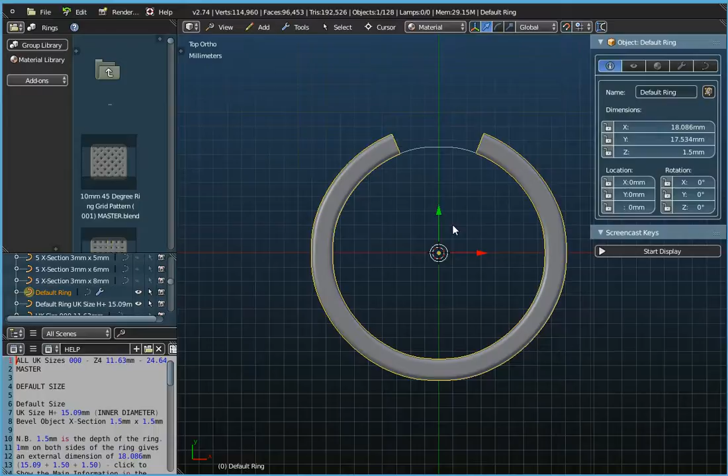At the moment it's UK size H+ set on the inside of that. Well, we're going to change that, and I'm going to change it to UK K+, 16.1mm, which is that object there.

So we need to change the original ring here. If we highlight it, and in the properties panel, if we go to the curve data information, if we go to the modifiers, we're going to change the curve here from the default ring to our new size UK K+.

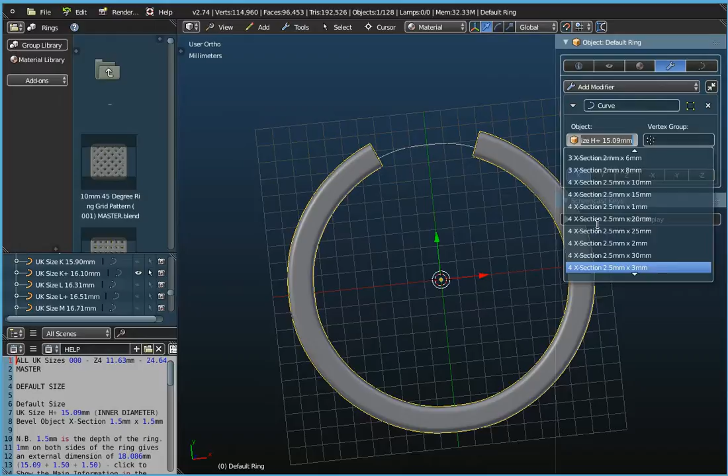So we just need to scroll down through those. So we want UK K+, 16.1mm, and then we just need to double check that it's actually lined up with the inside of there.

If we just view it from the top, not looking too bad, but perhaps if we just press the tab key and go into edit mode, we'll be able to see better whether it is in line with the x-axis there. Yeah, that looks okay. It is just touching the x-axis, so that's fine.

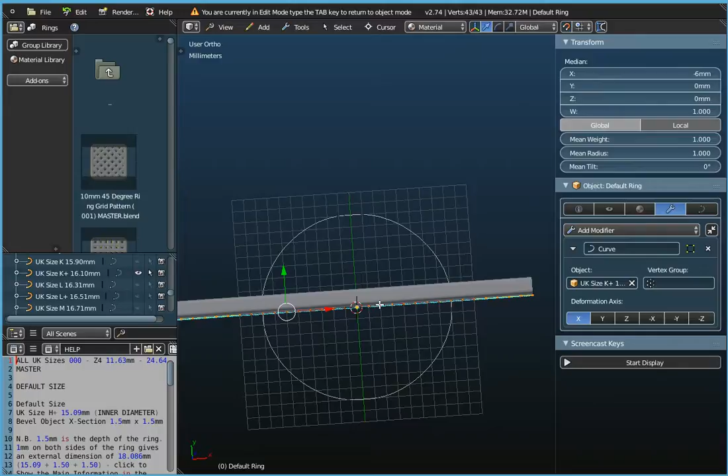So we can press the tab key to come out of edit mode. So if we just view it from the top there.

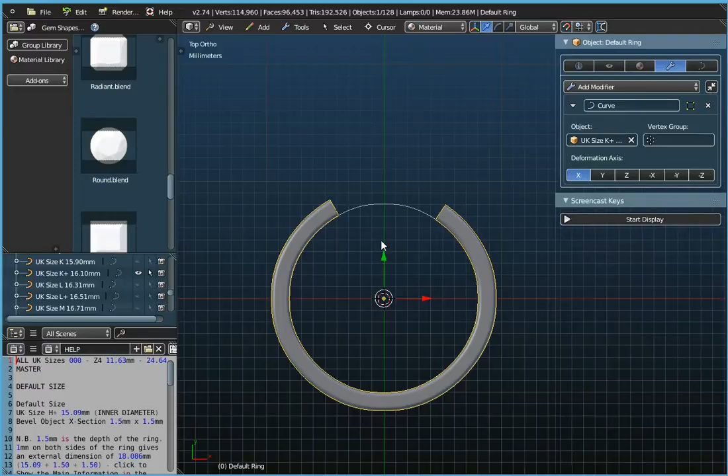Now we're going to use a round gem here, so if we just have a look in our menu system, we've got gem shapes. We're going to use the round gem, and as usual we don't drag and drop this object onto the workspace because our ring will disappear.

What we've got to do is append it from the folder gem shapes. So if we go to File and Append, and if we just go up the menu system to the groups folder there, we're looking for gem shapes, and it's the round gem that we're going to use, and as is usual we need the object. So it's the round gem object that we append from the library.

Now if we just make sure we click on it, and we've got the yellow outline. If we look at the size of this, the default size for all of these gems is 10mm diameter.

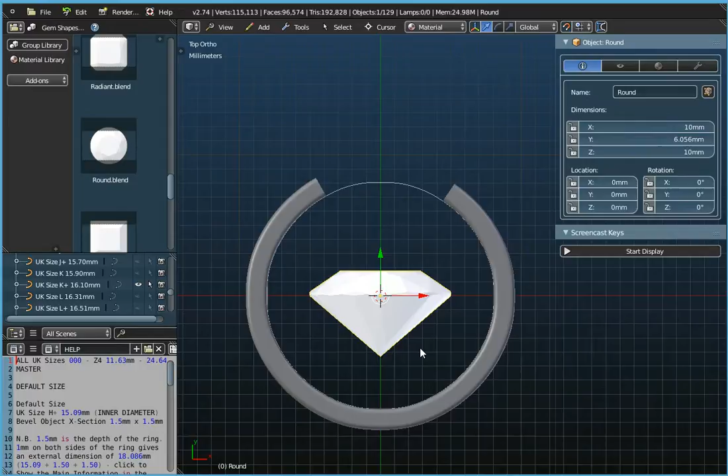So we're going to assume that the gem that you're going to use for this ring is half that size, in other words 5mm. So what we can do is, I'll just switch on the screencast keys. If we press S on the keyboard, and if we enter 0.5, we can scale that down.

So we're just using this gem so that we can size the gap for our ring here. Okay, so I'm going to not worry about the Y dimension here, but if you actually have your own ring, you can set that value as well.

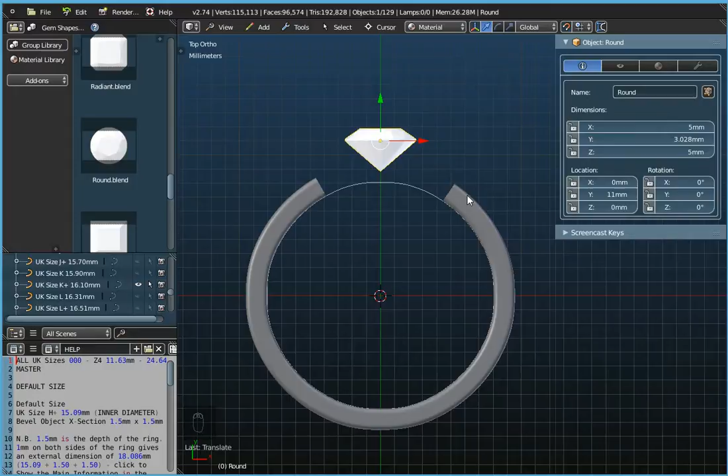So clearly we need to close this ring up a little bit, and also center it off. So highlight the ring here, object, and if we press the tab key on the keyboard, we need to extend the ring, and we can do that by selecting one control point at the end, and we press E on the keyboard and extrude it.

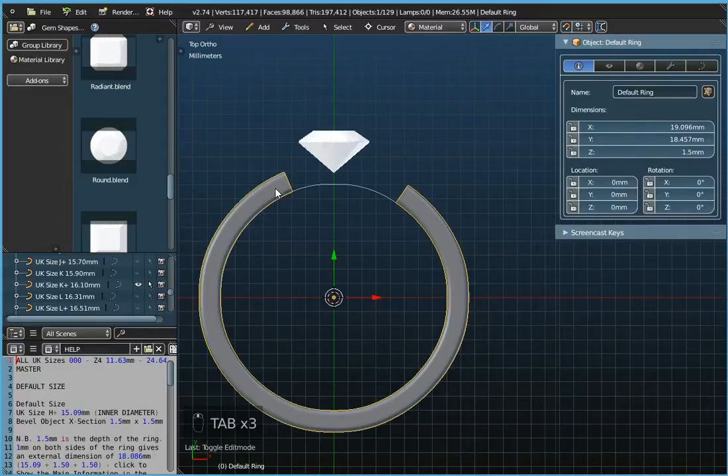And I'm just going to extrude it 1mm at a time because we've got the snap on here, so we're just going to control it by that. Now notice that I extruded the one on the right here, but it's actually the one on the left, as we look at it, that extruded.

If I just press Ctrl and Z on the keyboard to undo it, if you just watch this bit of the screen, you'll see that, I have to do it twice, you'll see that that's the bit of the ring that was extruded there. So let me just do that again.

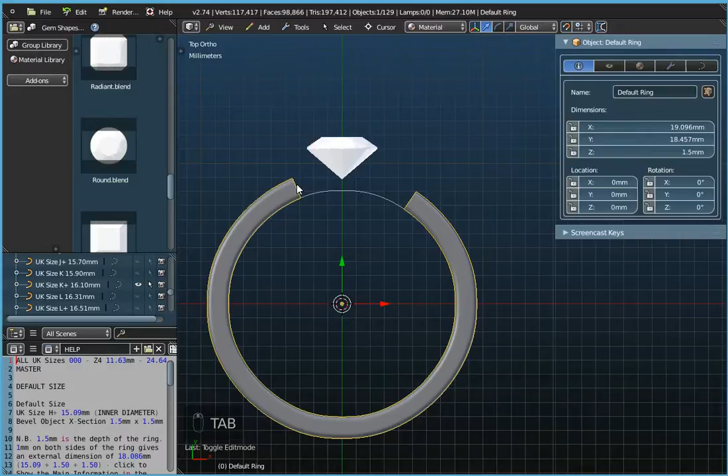So I select the right hand, if I extrude, and then if I press the tab key, this bit of the ring has been extended. So I need to extend the other side now.

So press A on the keyboard to deselect that control point at that end. And if we extrude this end, one, and I'm going to do it 3 times because there was quite a gap there. I'm not quite sure whether that'll be right. No, you can see that I've gone too far there.

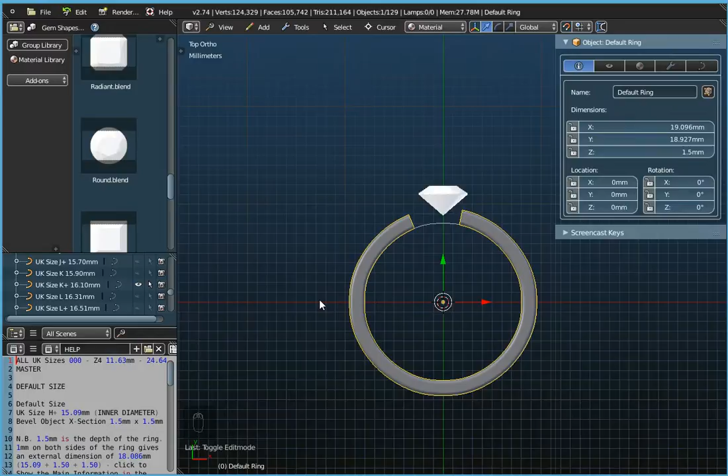So let's just go to the tab key again. And we'll just delete that last control point and press X on the keyboard and delete that vertices. And tab key. Okay, now that's much better.

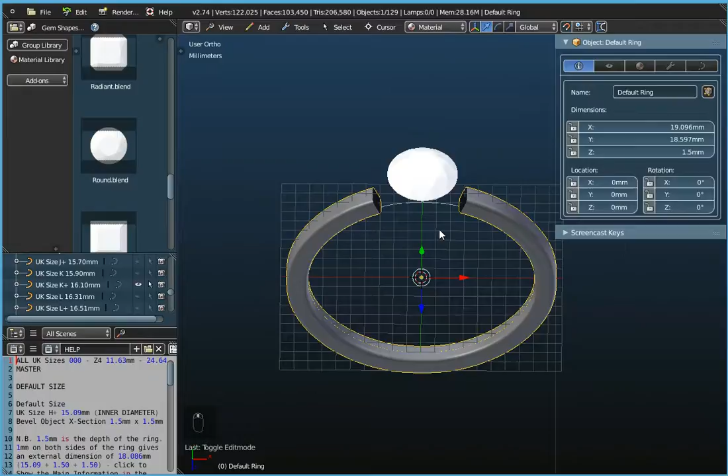Now it's not quite centered here, but I'll sort that out in a minute. Now what I want to do is fatten up the 2 ends here so that we can fit the gem between the ends of the ring.

So if I just go to view and top, I press the tab key. Now this time I'm going to select the control points at both ends, so I'm holding the shift key down and I've selected the control point at both ends, and I'm going to now change the radius.

And I'm going to increase it to 2, and I'm going to type it in as 2. You will perhaps sometimes have to play around with this value depending upon your gem size.

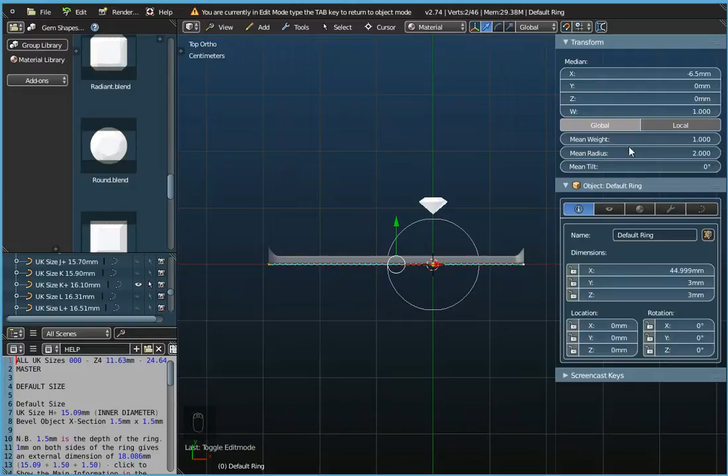Okay, so that's increased the size of those. I'm not quite sure whether I've got enough here. Maybe I need to go up to 3, so I'll press the tab key and change the mean radius to 3. I've just typed in mean radius 3 there and pressed tab again. Yeah, that's looking better now.

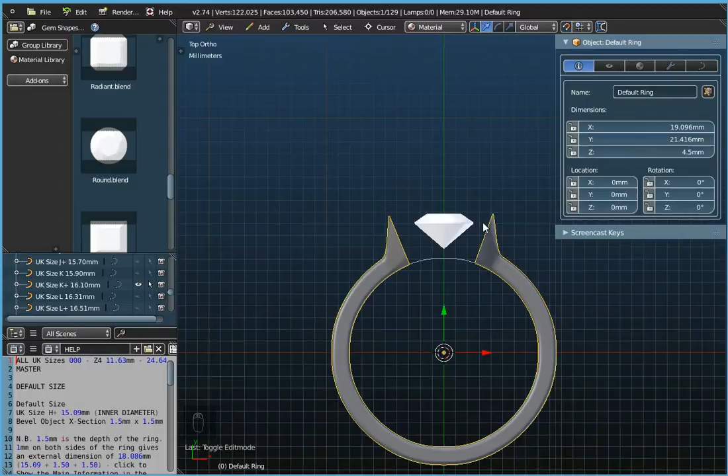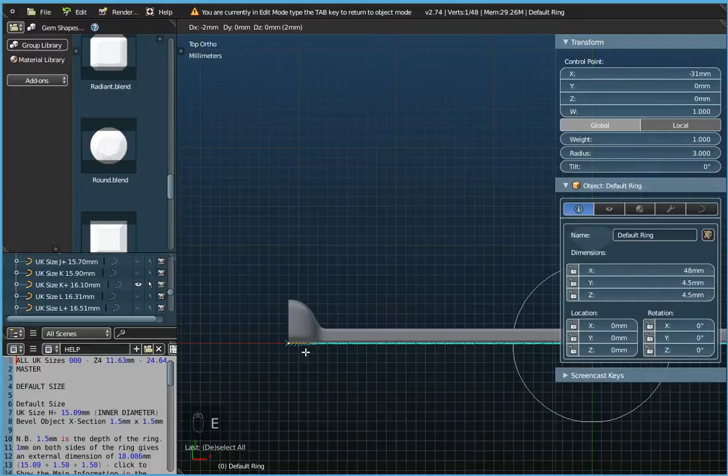Now I need to extrude the two ends because I need to get them close to this gem for a tension fitting. If I press tab on the keyboard, I can only do one at a time, so I'll press A to deselect, select just that end, and press E to extrude it and extend it 1. Press A to cancel that control point, highlight the other control point at the other end, and press E to extrude again. I'm just extruding it one at a time - let's have a look where we are now. Okay, that's looking a little bit better.

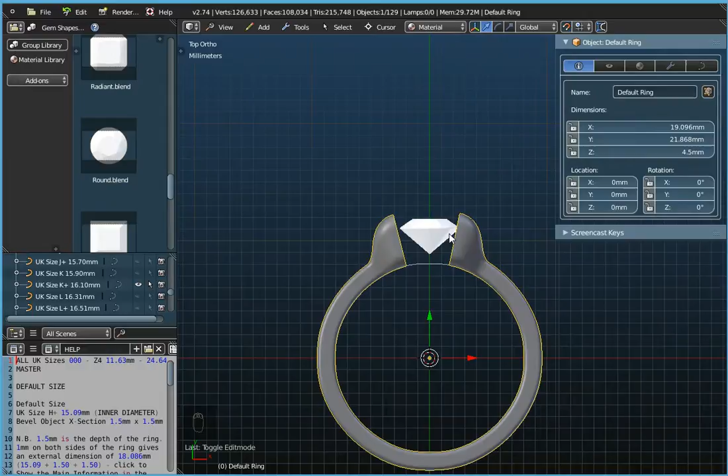Now what we need to do is fine-tune this. First, I think I'm going to try and rotate this so that it's even on both sides of the gem. If I press the tab key to go into edit mode, I'm going to have to select all the control points this time. I could move the x-axis here by dragging it, but it's probably better if I just try adjusting it up here in the transform panel.

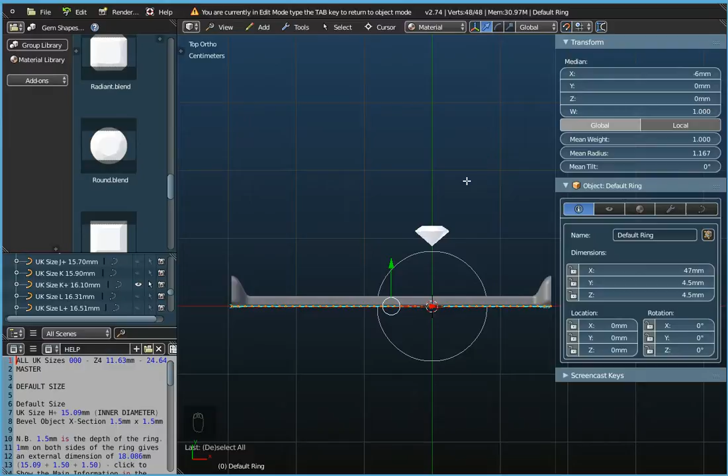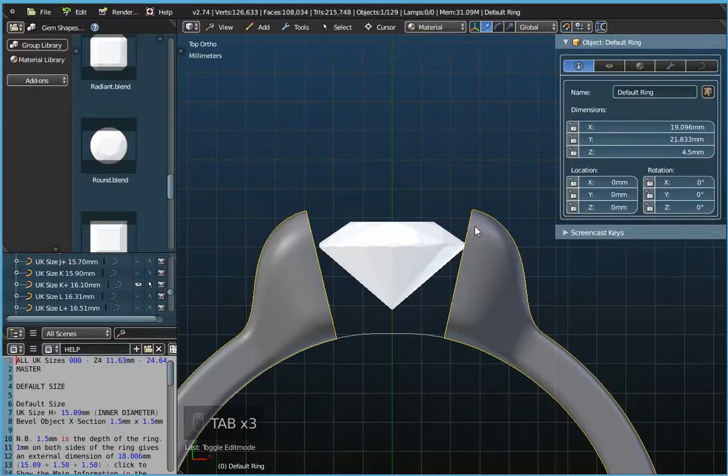So let me just try moving it. I've moved it 6 millimeters there. Now that might be too much, but we'll see when we go out of edit mode. Yeah, you can see that now the overlap is on this side, so I need somewhere in between those two values. I'll move that back to 6.3 - that's a little better. I'm almost there, let's try 6.4. Okay, now it's gone onto the other side. So I probably want minus 6.35 millimeters to get that exactly in the center, and tab key to come out of edit mode.

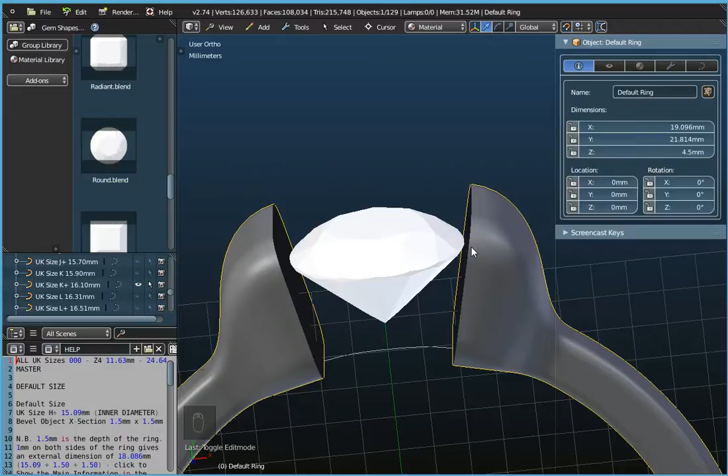Now that's much better. To set this as a tension setting, we've obviously got to have some overlap between the ends of the ring and the gem itself. So this time what I'm going to do is extend each end very slightly.

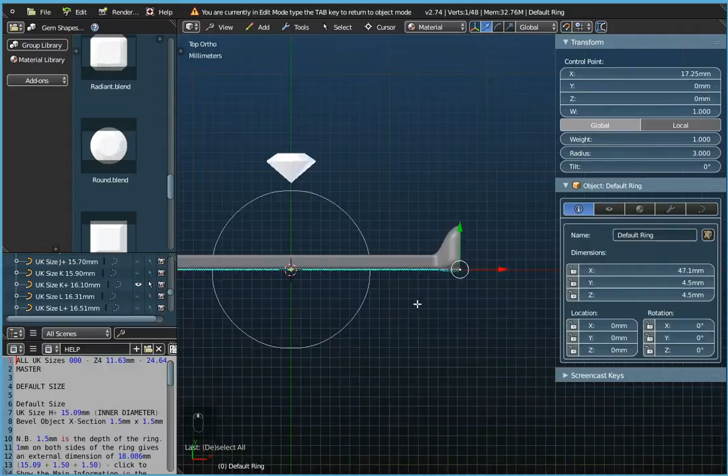A to deselect all the control points, and I'm going to select this end and move it to the right just by 0.1 of a millimeter, deselect it, select this end and move it to the left 0.1 of a millimeter, and then if we press the tab key, there we are - that's what we're looking for.

So we've got the gem now just overlapping with the two ends of the ring there. That will give us a tension setting.

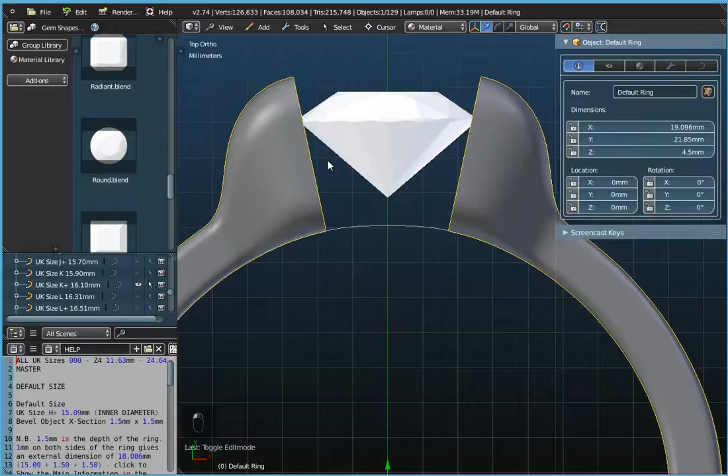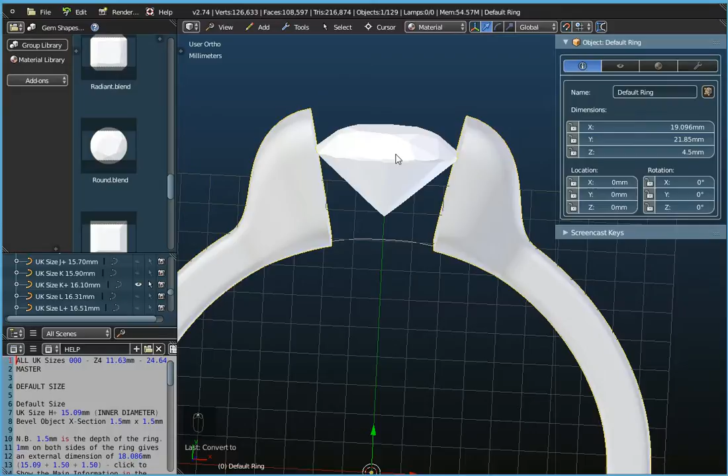Now in order to achieve that, what we need to do is to convert this ring to a mesh - Tools, Object Tools, and convert it to a mesh. Then what we can do, in order to get a little bit of an indent in each of those two faces, is go to view and top view, and we can use a modifier - a Boolean modifier.

If I select the Boolean modifier here, I want the difference between this ring and the object 'round' - the object round is the gem. So let's see whether or not it will perform that Boolean operation. It should be okay, just take a few seconds to do this. That should give us a little bit of an indent in those two surfaces in the appropriate place to support this gem.

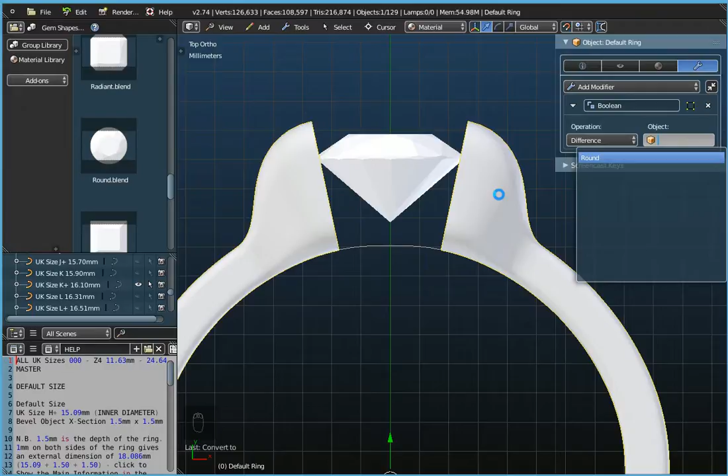Okay, so there we are, yep. Now to confirm this Boolean operation, we can either click on this box here to apply the modifier, or we can go to Tools, Object Tools, and convert it to a mesh. That will also apply the Boolean modifier, and that'll just take a few seconds to do.

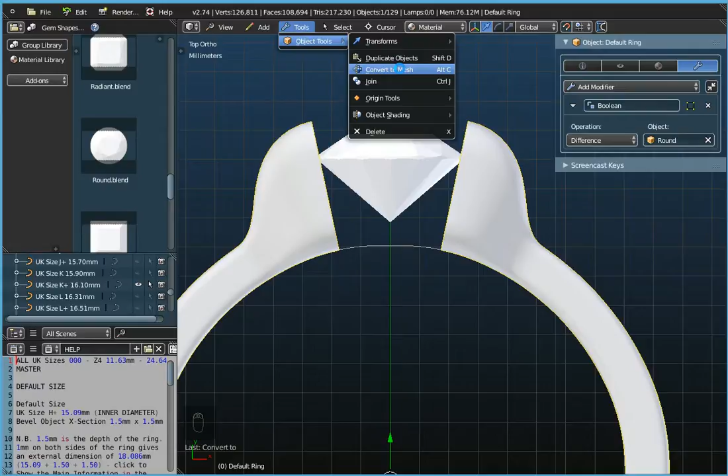Once we've got that, we should be able to move this gem out of the way. And when we zoom in there, you'll see that the Boolean modifier has created a little indent in the gem on both sides, which will enable us to create our tension setting.

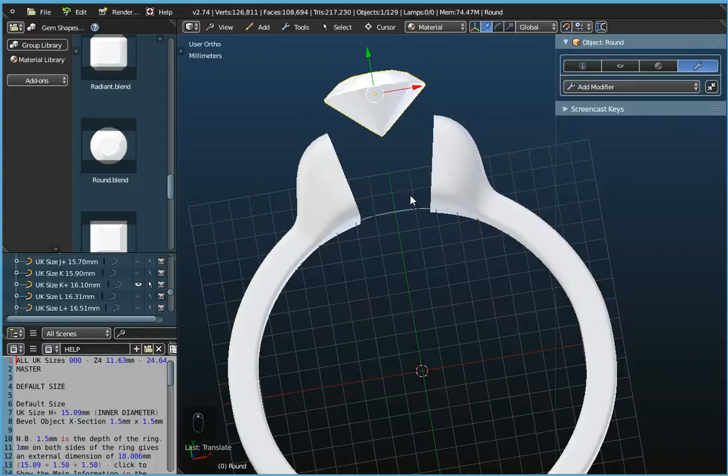So the only thing we need to do now is save this as an OBJ file, but we don't want to save this gem - that's not an object we want to print. So with it highlighted, if we press X on the keyboard and delete, and if we highlight our ring now, remember, not file and save, but file and export. And if we export it to the desktop as an OBJ file, it's a single ring.

And it's a tension setting, and I think it was size K plus that we set it at, and we could say also with a 5mm round gem. So we export that OBJ file to the desktop, and then it's a case of sending it to Netfabb Basic just to make some minor repairs to the file, and then we'll have the 3D printable file there.

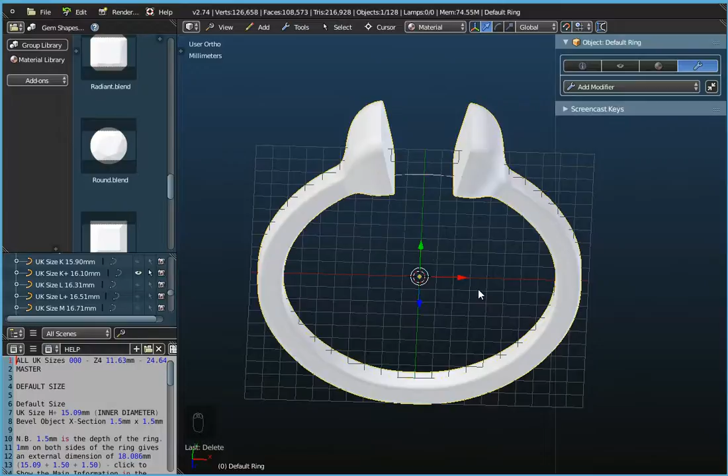Okay, so that's how you can create a simple tension setting ring with a round gem. Thank you.